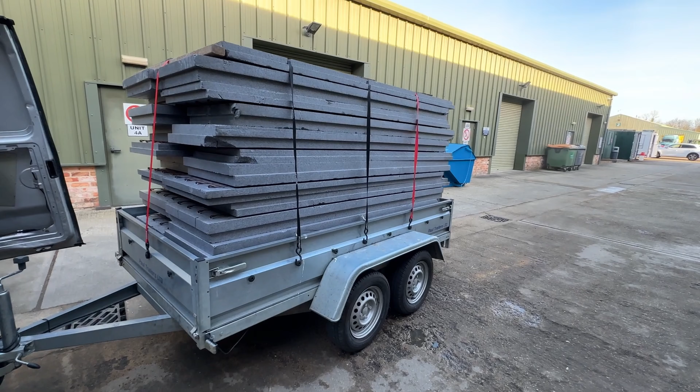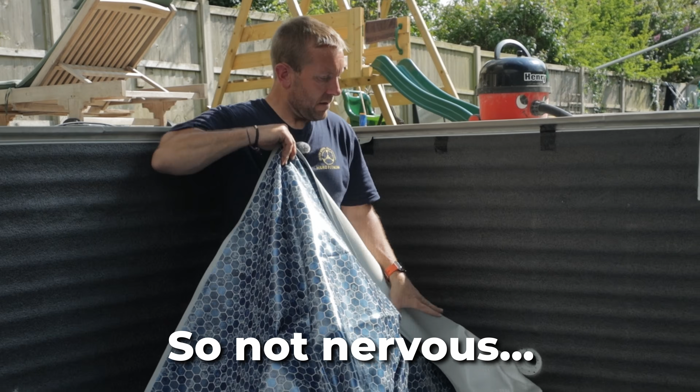What a journey it's been, from planning out the swimming pool to buying the walls to digging it to getting the base installed to getting the walls built up to designing and installing my own folding pool cover. We are finally here, possibly the most nerve-wracking video I've ever made on this channel, putting a swimming pool bag liner in and getting the whole system purged and in use. So don't go anywhere, this is a great video and for reasons you'll find out at the end, a very emotional one for me.

So we're back in the pool. This is something I've never done myself. I'm a humble plumber, but I've watched some videos on YouTube, and as you guys all know, that's the best place to learn. Max, I'm very nervous about this. Are you nervous? I'm not nervous. Max isn't nervous. Never, are you?

The liner has been in my office overnight, heating up to 30 degrees because it needs to be warm. We've held off doing this until the weather is warm because the liner manufacturers recommend we do it above 15 degrees. Today, we're talking about 20, 21 degrees. And this is just going to be a mad day. First thing I'm going to do very quickly is just hoover out all these tracks.

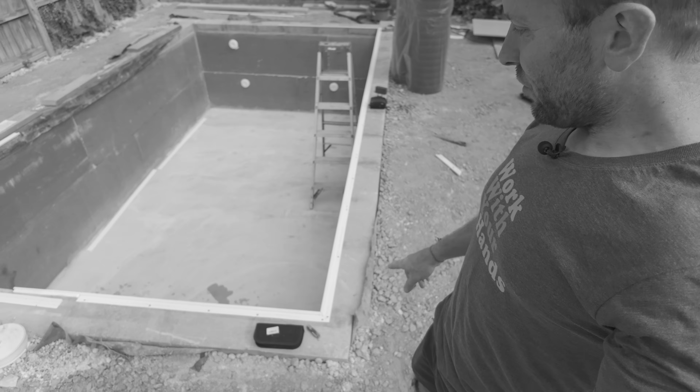Jimmy, hold your horses. We need to go back a few weeks first to before we put the first stones around on the patio. We've got all the brickwork in, that's all done. And I'm also getting in all the track around the outside, and I'll be showing you how I do that in depth in a few minutes time. But I just wanted to tell you that I've latexed the floor.

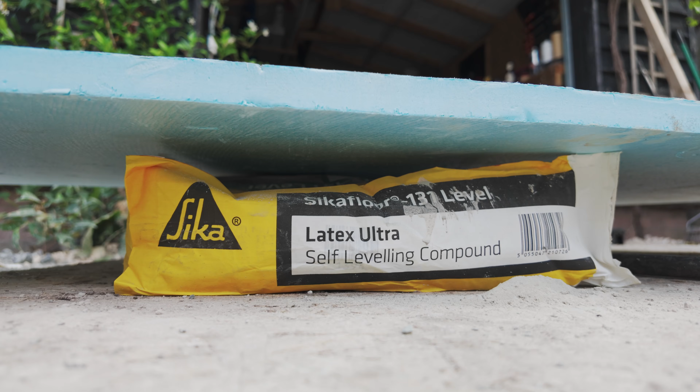Now I've used special latex for this. So for that, I've used Sikafloor 131 level. This is specifically for use outdoors and also for heavy traffic. So you can use it to finish off garage floors and things like that. I kind of thought it'd be perfect just to smooth out all the imperfections that we had in the floor before we put our underlay down. But look, as you can see behind us, we've got all our wooden beams in now. All our hardcore is now in, ready for the patio.

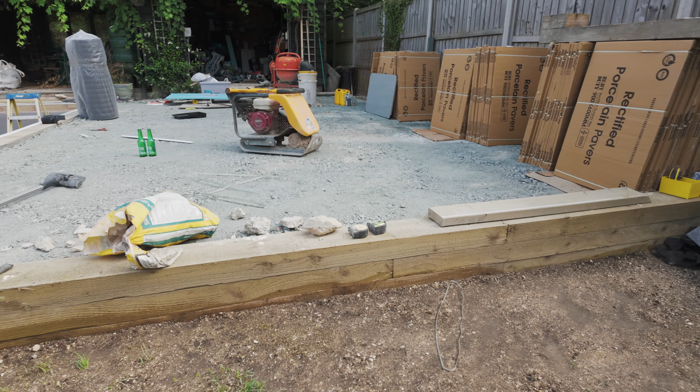So let me show you how I get all my liner lock installed. So what I'm using is top mount liner lock. So if we have a look closely on the edge, you'll see there's a nice little sort of groove that it can sit in just there. That's what our liner is going to sit in.

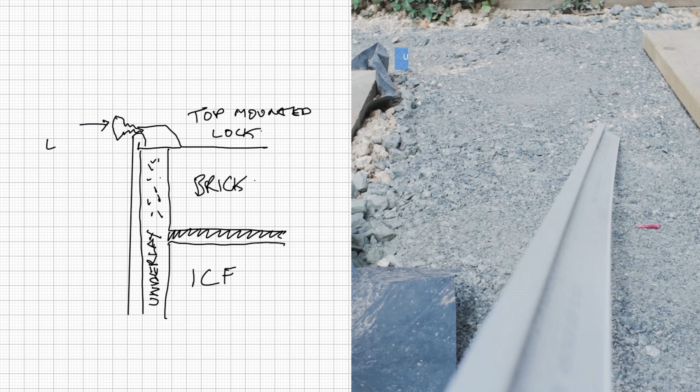And this is the reason I had to put this lot in, was because I wanted to have good anchorage points all the way round, because I suppose you could say the weight of the liner is going to go on that, but that's not really the case. Once the pool's filled up, the weight of the water is pressing outwards. It's not just dragging downwards. So I'm going to get the rest of this in, and I'll show you very quickly how I do it in depth.

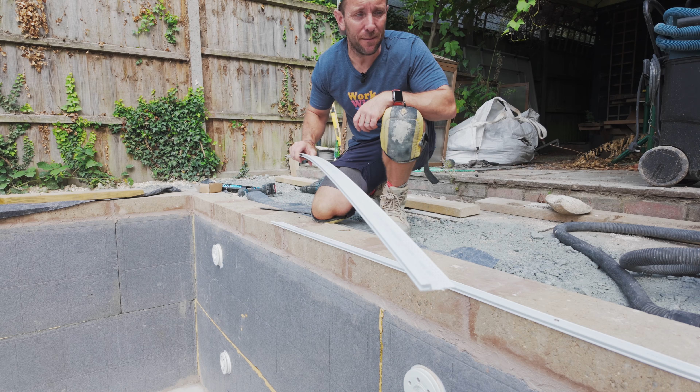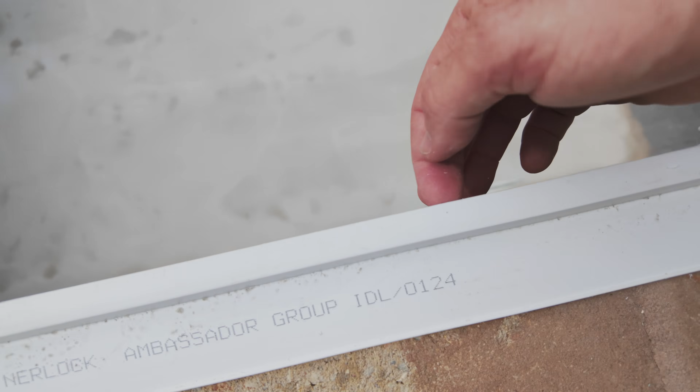First things first, with your lock, just cut the ends properly because it comes cut by someone who doesn't care about cutting stuff straight. So cut that end first before we then measure over and get our mitre. Now I can just butt that nicely up onto there, and we're leaving a few mil of a gap. I've just been using this to gauge that. I've got a little pencil mark on here because that will then take the depth of our underlay that we've got going along the inside wall just there, all right?

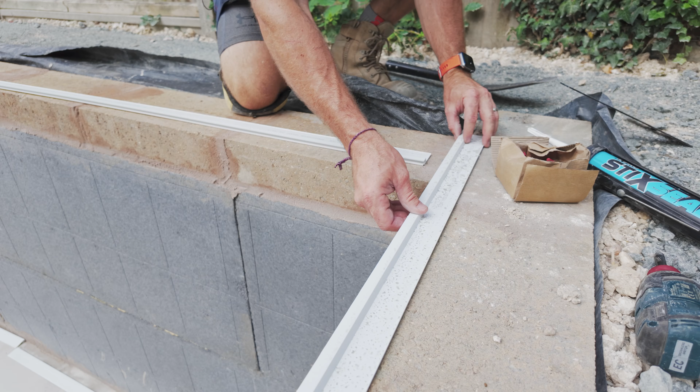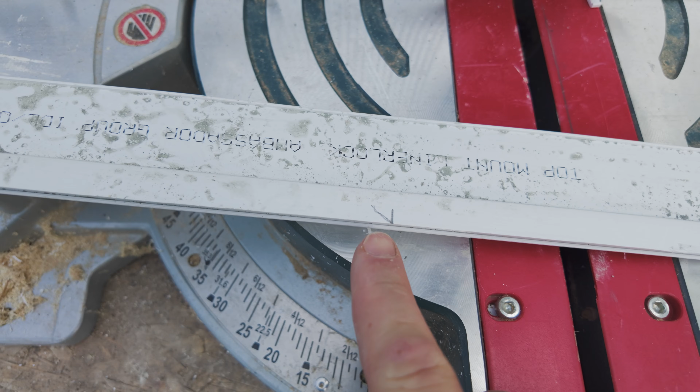And we've also got to do the same when it comes to measuring our mitre at this end. So we butt that up there, then we can nice and accurately mark exactly where we want that to be. So mark that there. And then I always put a little line, just indicating which way I want the mitre to go. So here's what I mean, here's our mark. So I'm gonna be using my beastly Bosch saw just to chop this. There you go, perfectly on that line.

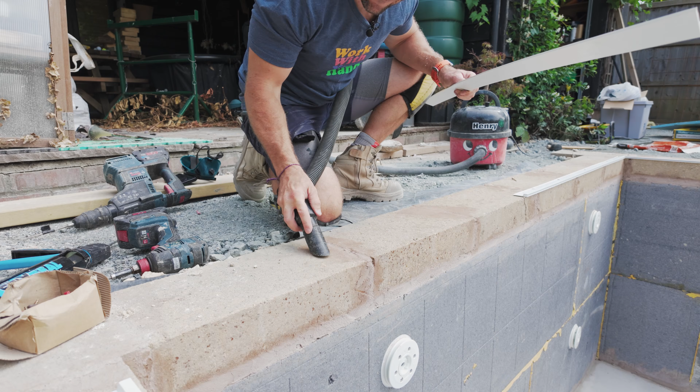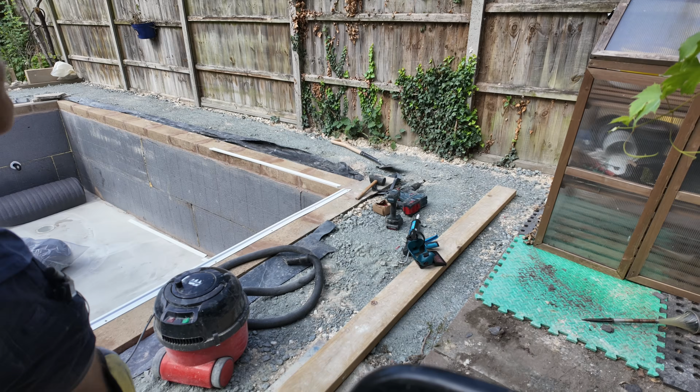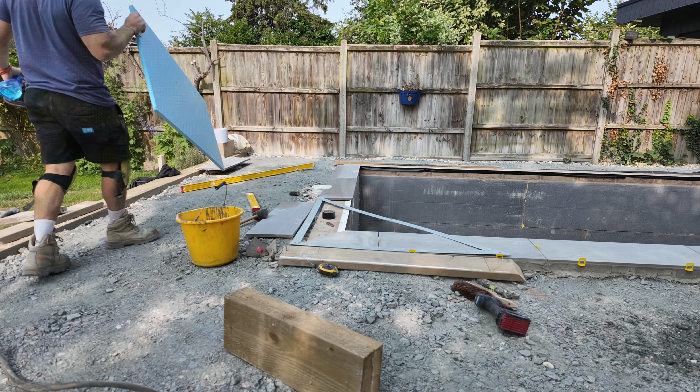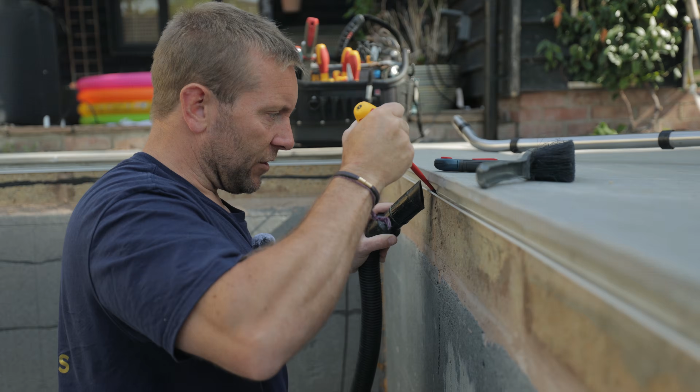So I thought it'd be a good idea for you guys to see that and know what I had to do to get that little track in. So let's fast forward to the present day. So hopefully this will just hold it.

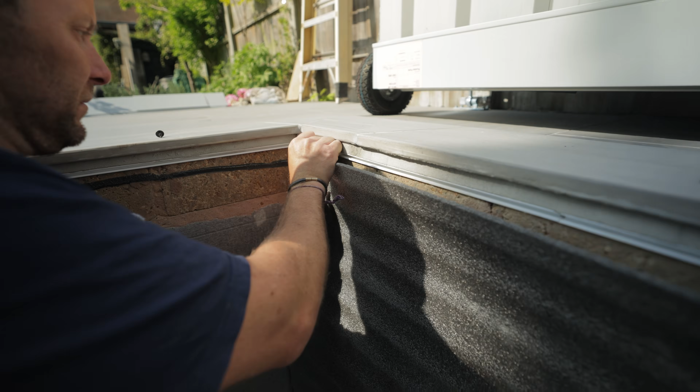So I had to stick on some underlay, which does one of two things really. It gets rid of all the impurities that you might feel underfoot or underneath the vinyl wall. It protects the vinyl wall from anything underneath, just in case you might have left something under there, like a tiny little bit of stone or dust or something like that. I mean, really, you shouldn't have done. You should have hoovered it out a gazillion times like I did before we started filming on this day.

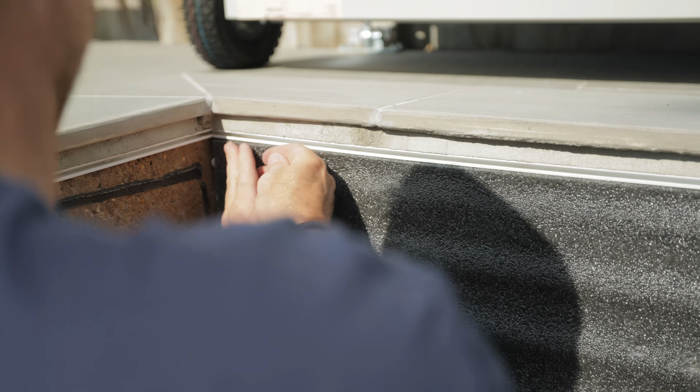But also what it does, it allows it to be nice and squidgy as well. So you've got that lovely kind of cushioned feeling underfoot when you're walking along.

I know you like filming, Max, but come on, give us a hand.

The problem was, when I went online to look at underlay for swimming pools, specifically for that, the price per metre is about 10 times more than what it is for what we're fitting here, which is underlay for AstroTurf. So that stuff's designed to be outside, it's designed to be in wet conditions all the time, and I thought, well, you know what, I'm going to use that.

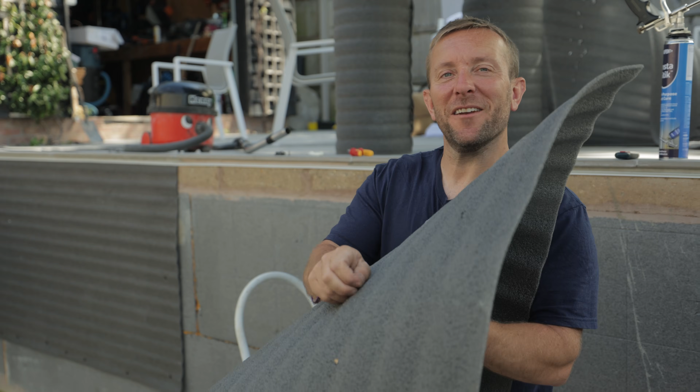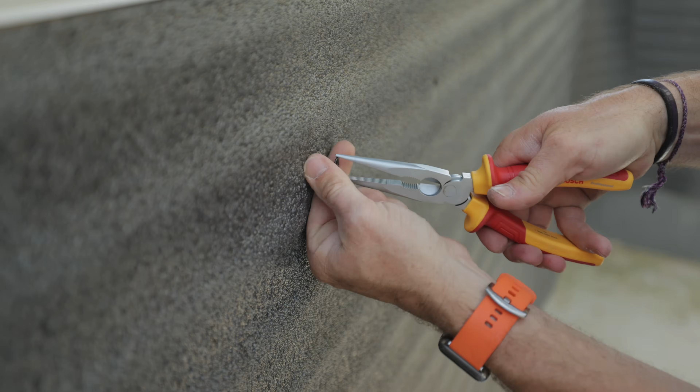The plan here was just to use an adhesive gripper foam, let it go off tacky for about 5 minutes, and then we stick the underlay on top of there. And it was getting hotter and hotter as well, so once that happened, it started to kind of warp a little bit in the sun, which is a bit annoying. So what we did, we used some pins to pop on there while it went off, and then removed those pins once it had gone off.

At this time as well, I thought it was a good idea to grab the massive parasol thing that I'd bought and bring that round as well, so that would give us a little bit of extra shade. I was very, very happy with progress.

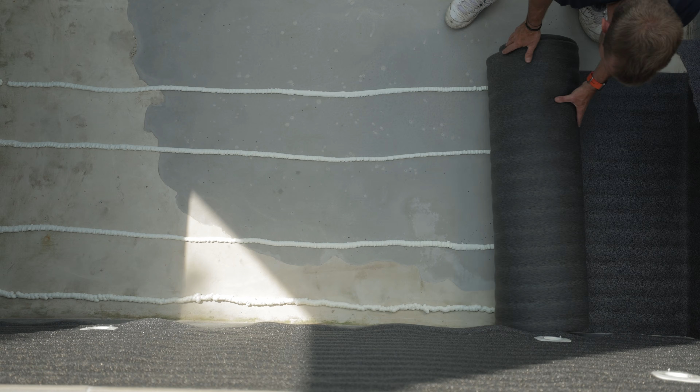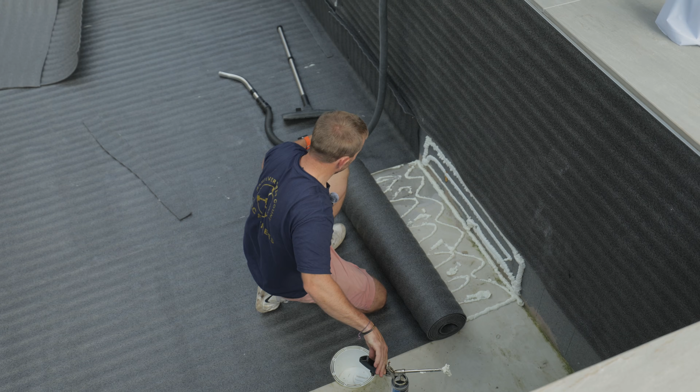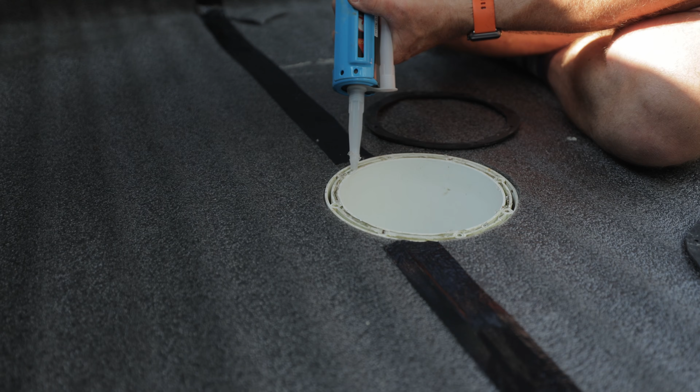Once we got the walls and floor all installed, it was then time to actually prepare the sumps. So for belt and braces, I put down some silicone and then the actual sump under seal. So this is the rubber gasket that I'm putting on here, just making sure that that's stuck down, ready for the next and most terrifying stage, getting the liner out.

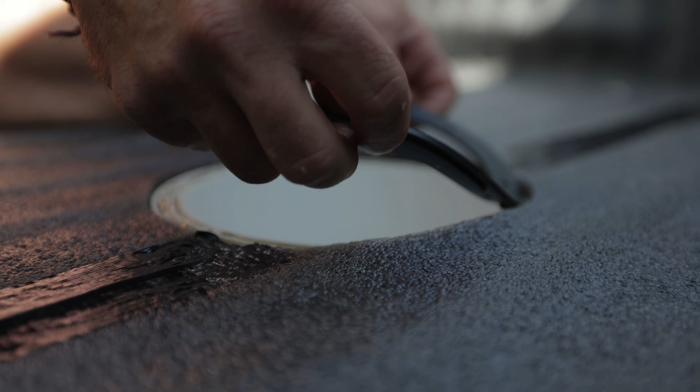I've never done anything like this in my life. I don't know what I'm doing. I really, really hope that my measurements, because I measured this, are correct. Let's find out. Ready? Yeah, cheers, mate.

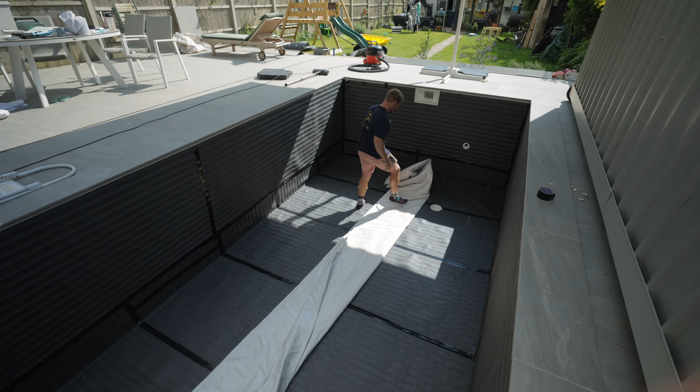So, what have they written on here? Skimmer end. Right, so when this was made, I measured this, so if it doesn't fit, it's my fault, unless they haven't made it to my measurements. I'm sure they have. This is their duty. They've marked this as the skimmer end. This is obviously the skimmer here.

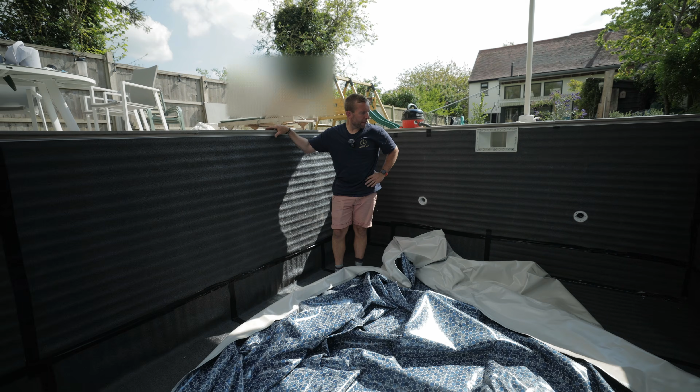So what we're going to do now, basically we've got to get it in so we know that our joins and everything are right. There's going to be a lot of moving about, getting stuff in the right position. At this point, the batteries in my microphone ran out, which was probably a good thing.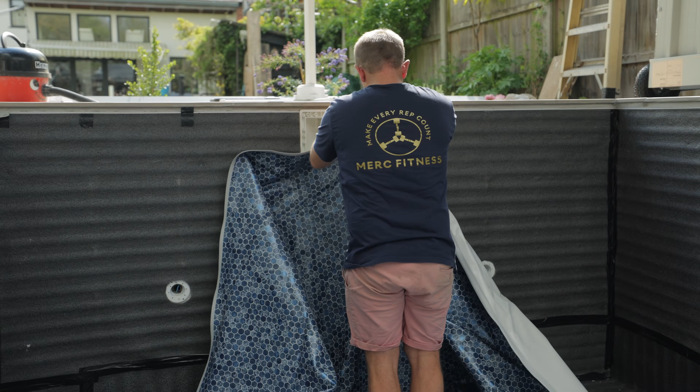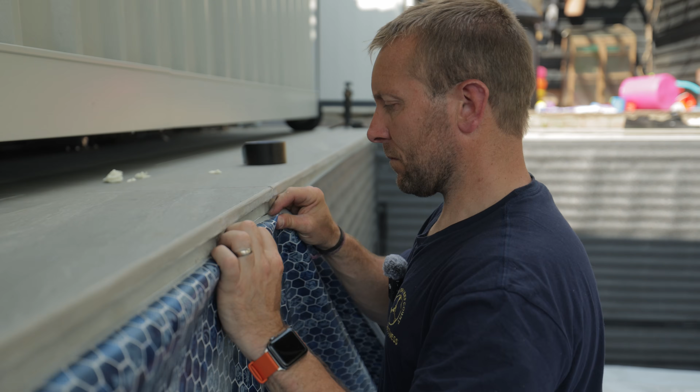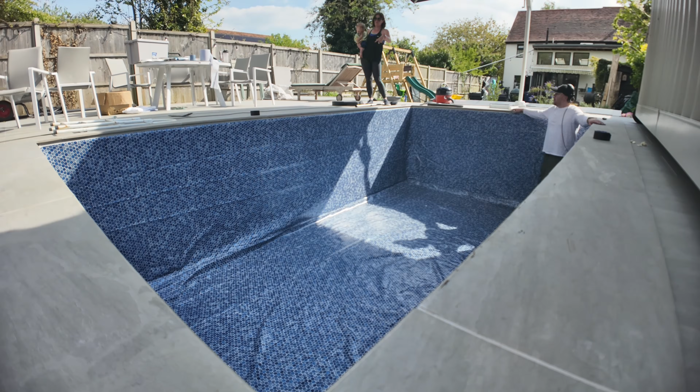So the first thing we had to do is actually get the bead liner at the right end. As you saw there, it was marked skimmer end. Then you've kind of got to orientate it because there are 4 sides to it, and you can see those sides in the seam cuts that they've done when they actually make it. Another thing is the material can actually stretch to 200% of its current size, which means they actually make it slightly smaller, so when you fill it up with water, it stretches out into the spaces.

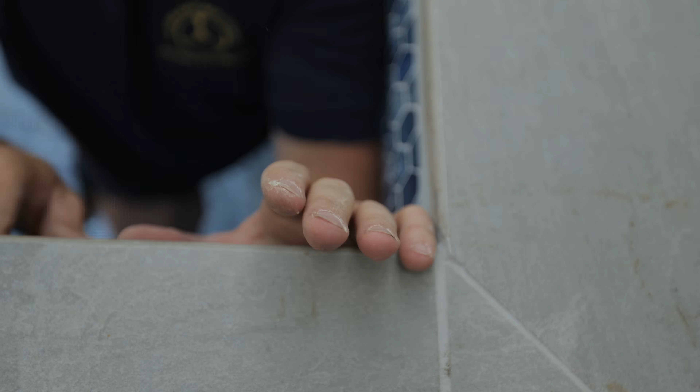Honestly, I don't actually know what I was worried about. Once we started doing this and getting it all in, there were a few expletives to Max, who kept giggling behind the camera, and I was like, Max, can you just give me a hand, please, mate? I'm getting really quite annoyed with you. It all went fine. Yeah, it was a lovely day.

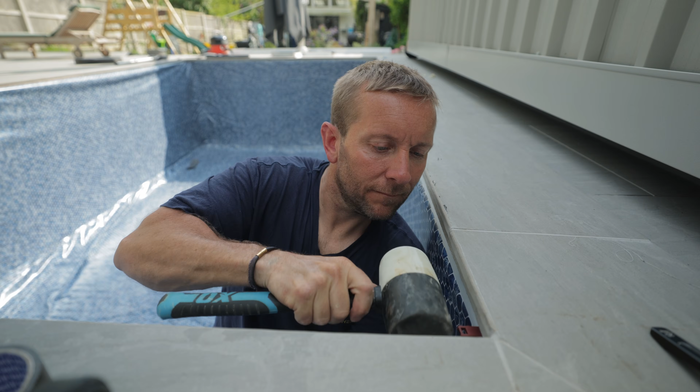Really enjoyed it. So now we got it in position, we needed to figure out how we were going to get rid of the wrinkles. This is when a vacuum cleaner comes in very handy.

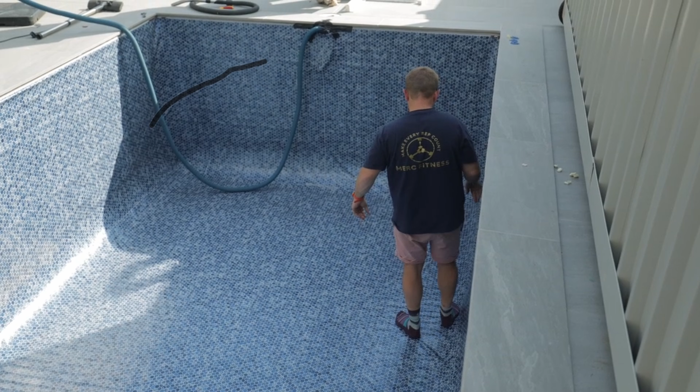And there it is, my massive Bosch Hoover. Gaffer taped around the top where the skimmer is. Does look a little bit like that scene out of Spinal Tap.

Do you have any artificial plates or limbs?

But the Hoover I was using for this is perfect because it doesn't actually overheat. It could just run literally all day like that, sucking out all the air behind, and then I could go around with my feet and wheedle out all those little wrinkles.

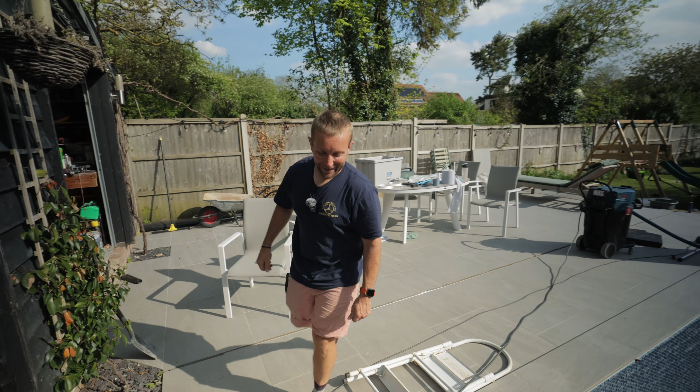Max, well done. That was a good shout. Why do we not just do what the professionals say? Well, that's ready for water, mate. Filling the pool up. I can't believe it. The little bit there. Once it's filling, I'll say in it. Wow, man. Isn't it mad? Don't you feel like, whoa, it's been such a long time to get to this point?

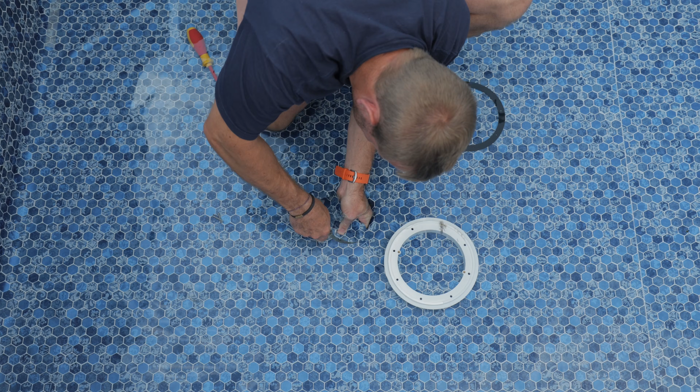So having watched YouTube and seen other people do vinyl liners online, I knew I had to wait till there was about an inch or two of water in the bottom before I started cutting my sumps in. Don't worry about those wrinkles behind me, they all came out once the pool had started filling up more and the water was pushing out into those corners to get rid of them.

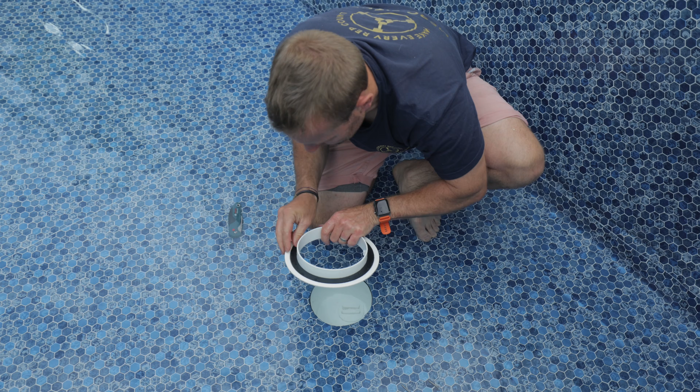The hardest part of this was finding the sumps themselves and also then finding the screw holes and also just cutting them with a very sharp Stanley knife and not dropping it and just not making any mistakes. I took plenty of time over this, even though the water going in was 14 degrees and my feet were getting really quite cold. Got those rubber gaskets over the top.

I knew that my bottom gaskets were going to be in the right place because I'd glued them down already, and it was just all that forethought that goes into doing jobs like this always comes together at the point when you need it to. You just have to do the forethought first.

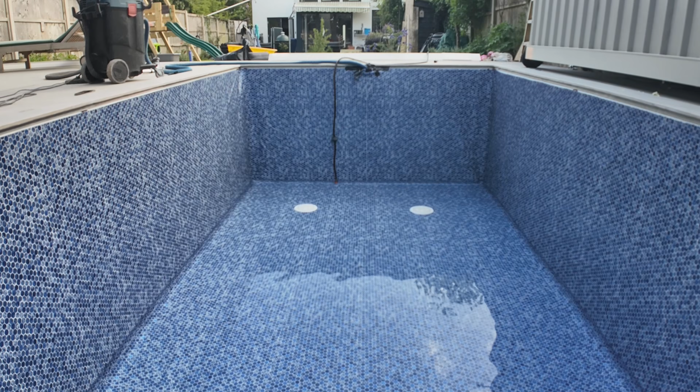Now again, because I've been online and actually watched videos of people do this already, I knew that I didn't want to cut in my bottom outlets, the lights and the top outlets until the water level had actually reached those outlets. So we spent the rest of this day filling the pool up, every so often popping the Hoover on so it sucked out, and also lighting the barbecue.

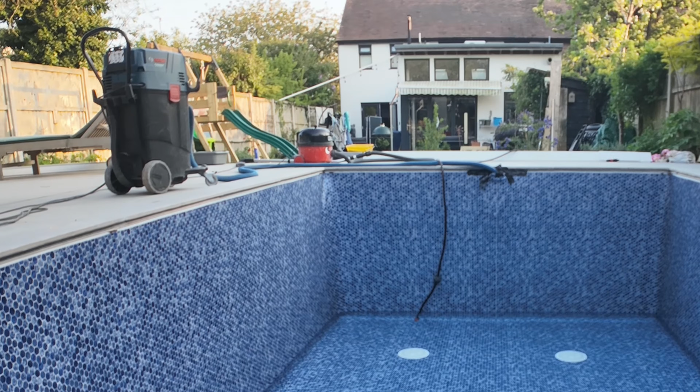Right then gang, it's another day. I didn't leave it filling up overnight because we've got some stuff that I needed to do on the outlets. So let's just turn this on. I've marked out all my outlets with just a little bit of gaffer tape. So the bottom outlets are going to need to be done now. And then I've got to do the lights after we've filled up for about another 2 or 3 hours.

Any minute now, we're going to be cutting in our bottom outlets that I've just marked there, the couple of bits of gaffer tape. So it's going well, guys. Look how beautiful the pool's looking. Isn't it just sweet? So to get the outlets in, first you've got to find them. I obviously gaffer taped mine.

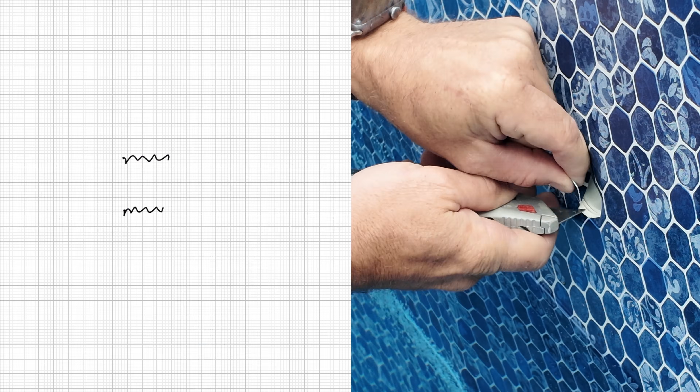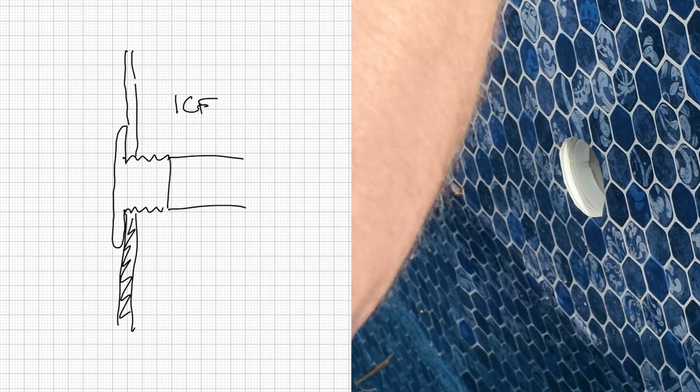I pulled the gaffer tape off and then very, very carefully with your finger, feel the edge of the outlet hole and then go around it like I did with a really, really sharp Stanley knife. There is no margin for error here. One slip and that Stanley knife will go straight through the vinyl, perhaps in the wrong place, and you've ruined your vinyl or you've got to make some sort of puncture repair.

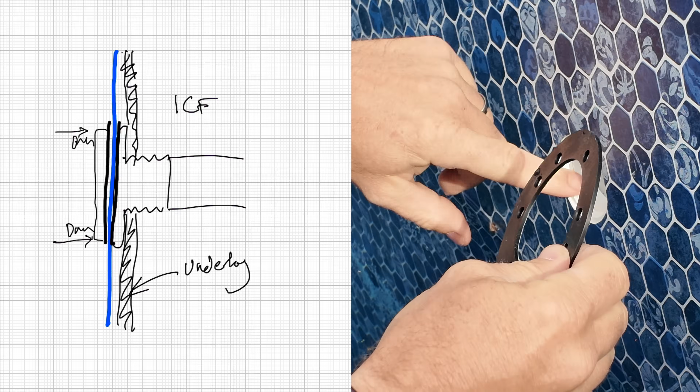Now, I made a mistake here with this because this has got a sticky back on it. I should have just stuck that on before I put the liner up, but I haven't, and this is where we are now, so that's life. So I had to then just feed it through the hole that I'd cut. Then I could find the screw hole. Then I could put the plate and the gasket over the top, screw those both up, put the decorative plate on, and I was finished.

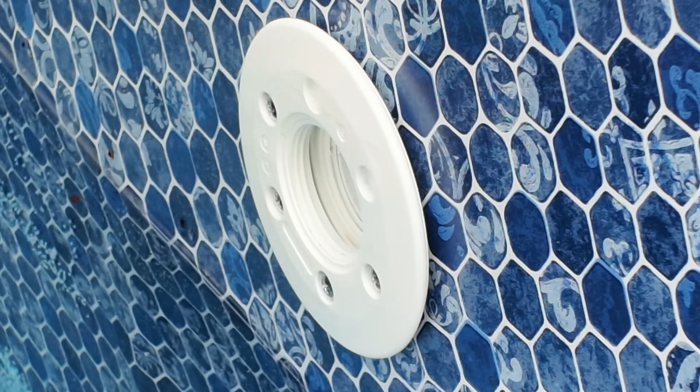I did this 4 times, and if I ever did this again, which I'm probably not going to do for about another 5-10 years, I would definitely stick my gaskets on first time. I had to do exactly the same thing for the lighting, although the lights were a nightmare because I don't know who designs these lights.

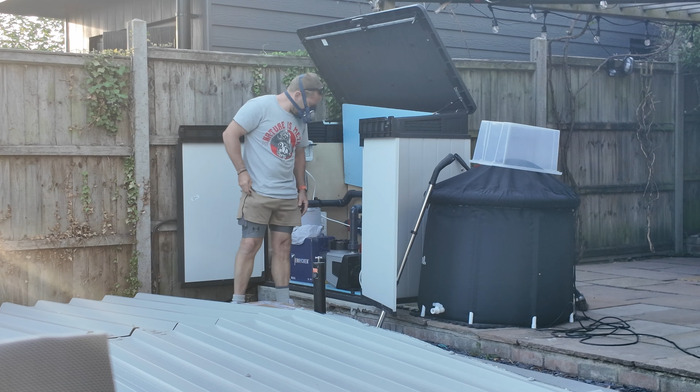They screw up so far into the conduit that I fitted, so I did have a few problems doing this, but I got it in the end, and I also just belt and braced it all with a bit of PTFE on the thread as well, even though it was actually sealing on some flats with some rubber gaskets on the back there.

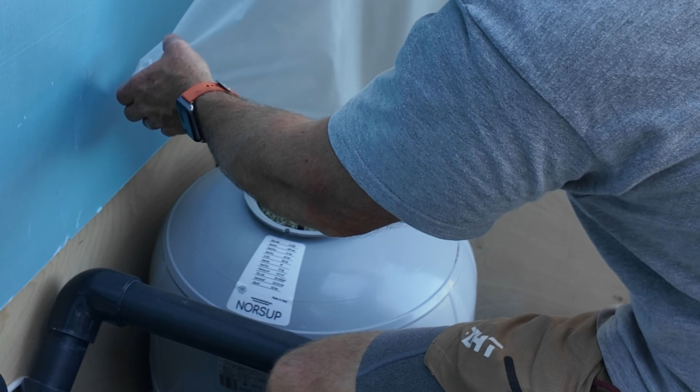Now I had a long wait for the water to fill up towards the skimmer level so I could do that. So in the meantime I added all my filter media, which is basically specialized glass. It used to be sand, but they use glass now. I had 3 25 kilo bags of that to put into the filter. Also, while I was waiting for this to be done as well, I shut off the valve to the filter and filled it up with a hose from the top, and also did the same with the pump. So we were ready and primed to turn the whole system on after I'd done the skimmer.

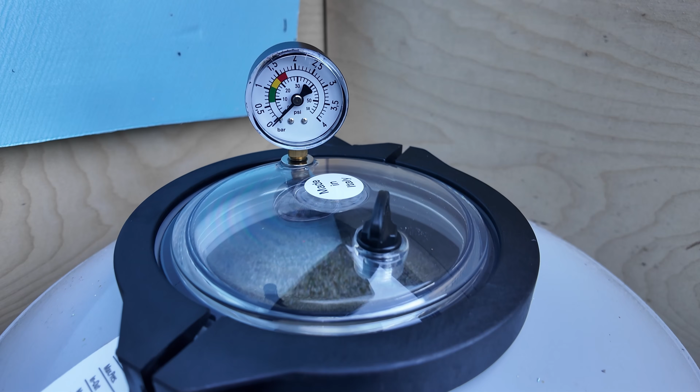So it's a bit warmer in here now because it was getting up to a certain height on a man where you don't want cold water, all right? They were sort of clutching themselves away. They were like, oh dear.

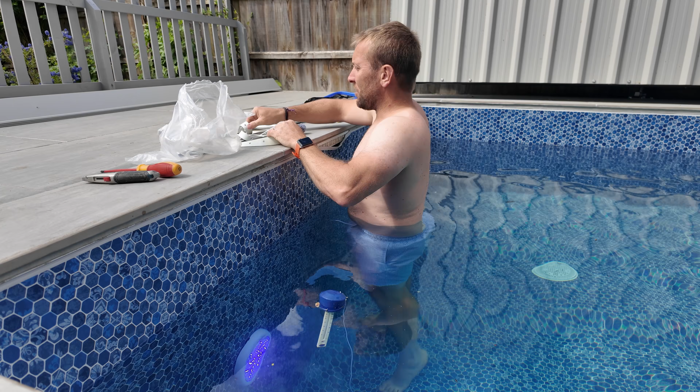So yeah, I'm just going to get these 2 top ones cut in. Then we'll have a look. I'll show you exactly how I'll do this skimmer because I don't know. I don't know either. On this really quite chilly Sunday in 19.5 degree water. So we've got 2 seals to go in, a seal at the back, seal at the front. It's pretty straightforward really. I'm just going to read the instructions to make sure. And yeah, oh dearie me, it's cold.

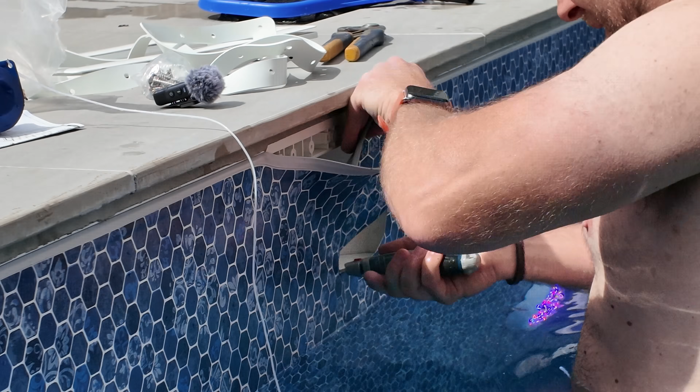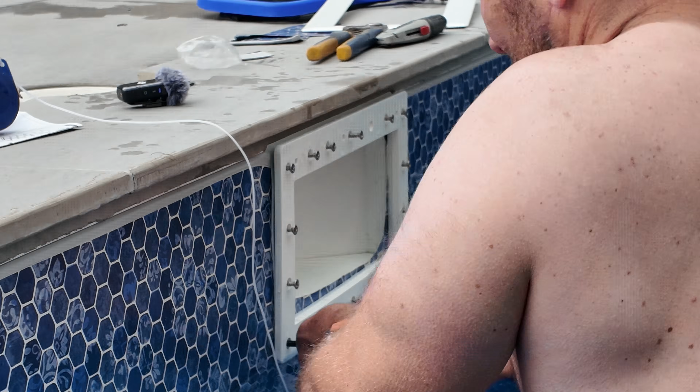The skimmer is just like everything else. Find out exactly where the skimmer lip is, cut away with a very sharp Stanley knife where you don't want your vinyl to be, pop the underside gasket on, the top side gasket on, and then the fascia plate. And then obviously after that, drop the screw into the freezing cold water and then have to go down underneath to get it up again. And it is chilly. All right. Oh, I'm cold now.

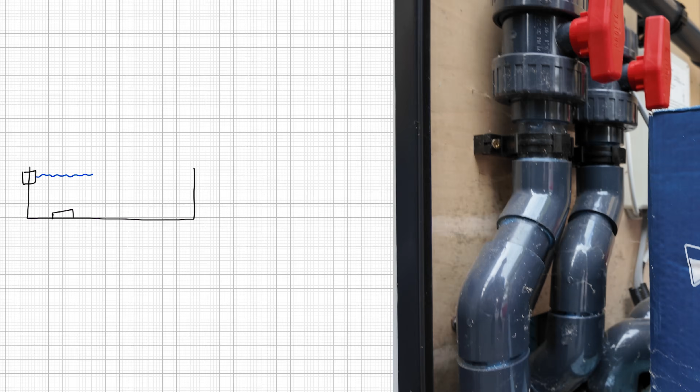It's now time to fully purge the pump and get the whole system working. This is a majorly stressful moment for me because all this pipe work I've laid in, I have pressure tested it, but you just never know, do you? So obviously our water level is there, and that is the same for the pipes that come off to the inlets just here, but also up from our skimmer and our sump.

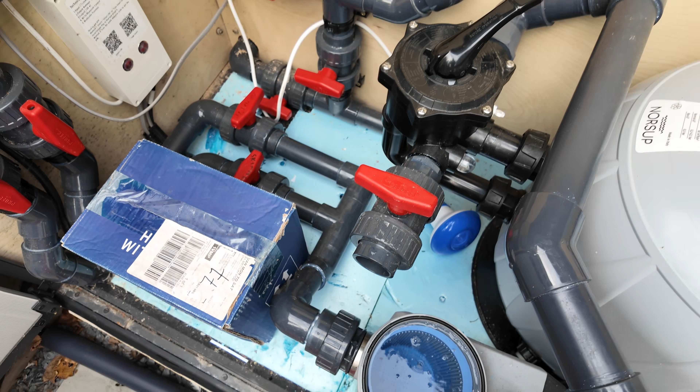So what we need to do is turn the skimmer off, turn the sump off. Let me try and create a little prime, so that now the water's not falling all the way back to the pool again. It's staying up here. And if you want, I can demonstrate it for you now. If I open that valve up, this water level is going to drop down. So say let's do the skimmer. Look at that. Because it's just going back to the skimmer. It's going back to its happy level.

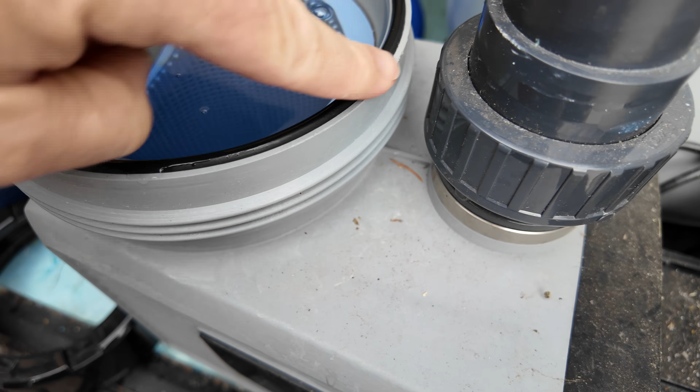So I'm going to fill this up as far as I can. I'm going to want a few buckets to do this. Make sure that our O-ring is nice and clean. Pop this on top. Do this up. Set this valve here to filter. And what I'm going to do is use this app to go to the pump and then set this just to circulate, turn on, because at the moment this pump will only come on when the air source heat pump is heating, which obviously I haven't had running yet. So confirm. Right, so it's about to come on then. I just turned it off.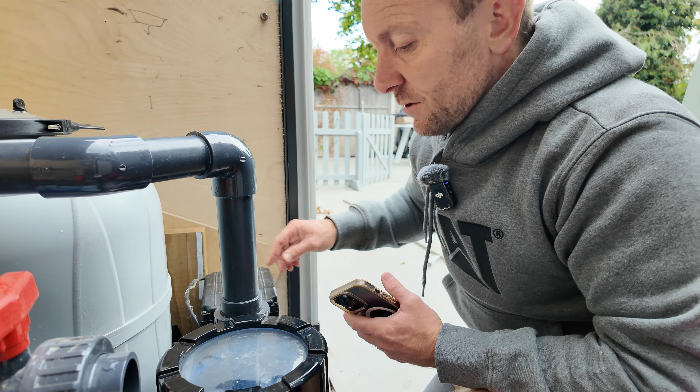So what I've got to do, and this is so good that as a plumber I'm like, oh, I completely understand this process. It's so sort of easy for me to do. We turn the pump on, and then before the pump's built up a load of pressure, what we want to do is suck up solely from the sumps. So that's what this one here. We know all the pipe work going back to the sumps is pretty much empty now. So this is going to take probably 5 or 6 cycles of us doing this.

So turn the pump on. It's going to run up. Open that. Oh my God, it's happened first time. Whoa. Oh my God, that's so good. Slowly open the skimmer up. Let's see if we can get it back from the skimmer.

Now the skimmer's struggling. I'm happy with the sump though, so I'm going to bring that more shut. So if you look there, you can see the water flying out, but we really want this water to be right to the top of this little window here. So I'm going to shut the skimmer off, add a bit more water, get that right full to the top.

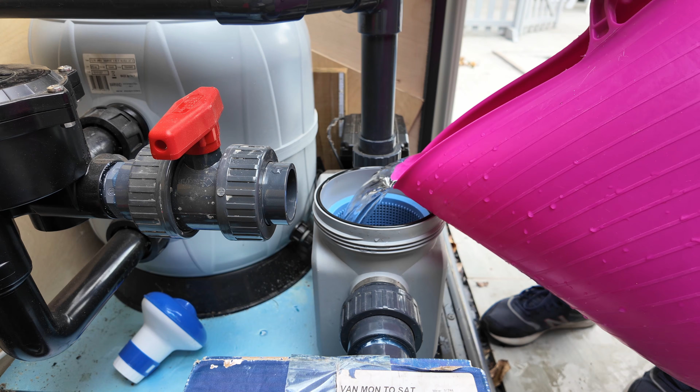God knows how long this must take if your plant room's like 2 or 3 meters above the pool water level. It must take ages. Wow, look at the water coming out of here. Oh, look at that. All the air coming out. It's purging all the air out of itself. Oh my days, this is so good. There we go, gang. Sucking nicely.

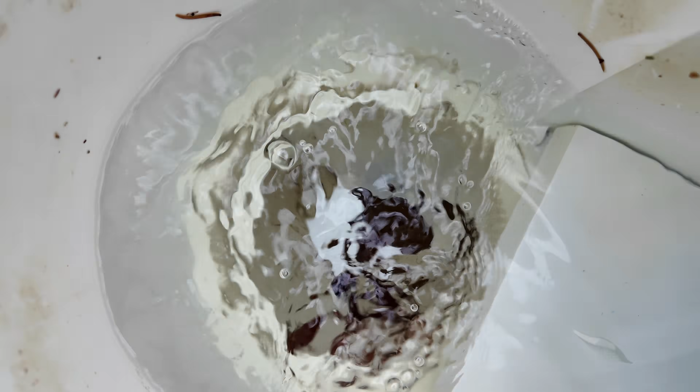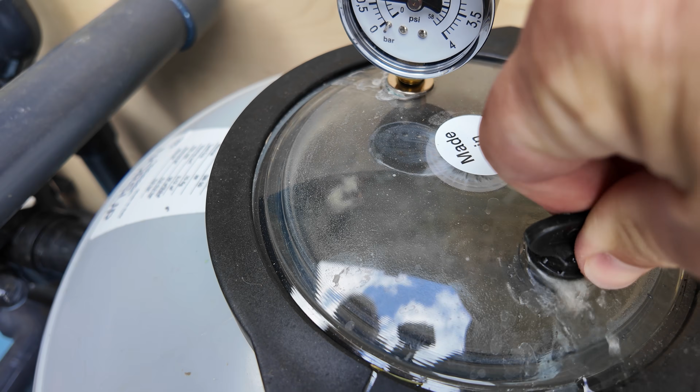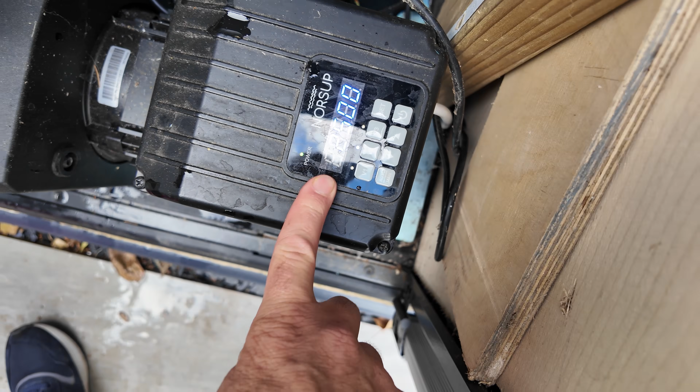Woohoo! So guys, there you go, all purged. And we're filtering. Got water filtering about in there. Probably more of that out now. Pressure's sort of in the green. Nice. Oh, it's all working. I've got the sumps on half, skimmer on full. This is on 2,500 RPM. Quality.

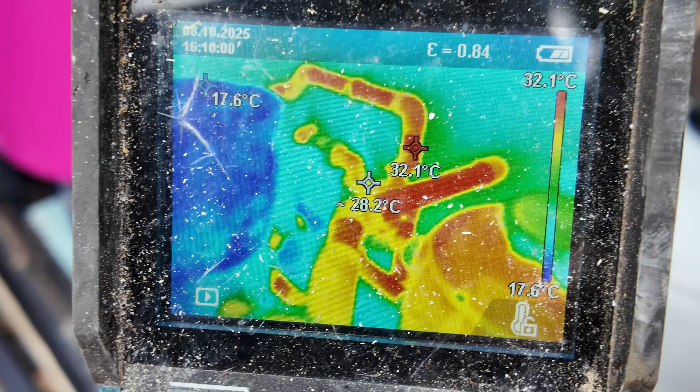Oh my days, everybody. Can you see that? 32.1 degrees C. Just check out what that looks like on the old thermal camera as well. That's sweet, isn't it? Time to dive in, everybody. And I'm filming this now in October. And what's keeping it warm? All that insulation underneath that cover.

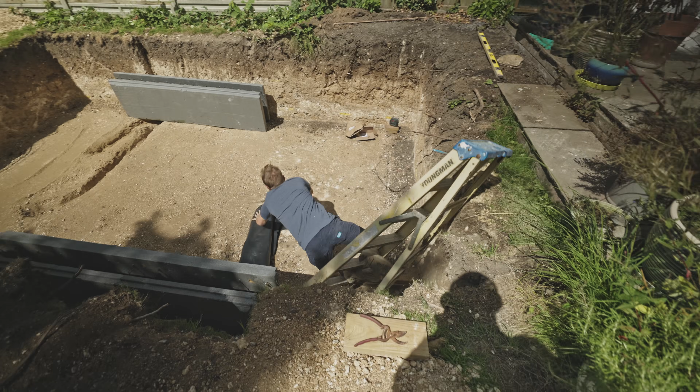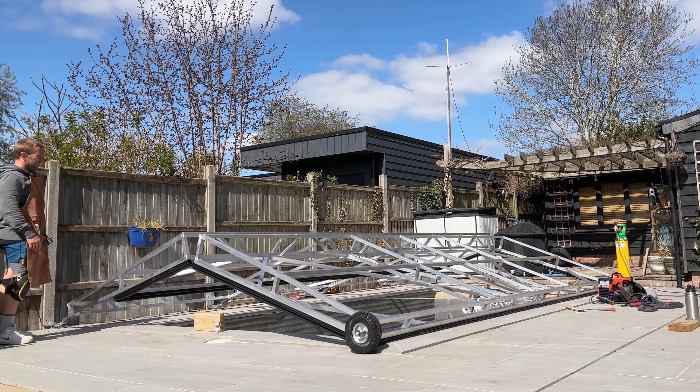What a journey it's been, from driving up to Sheffield to buy the walls, to digging in the baking heat, pouring the base just in time for it to pour down with rain, getting the walls and pipework installed, having loads of help with the patio, designing and inventing my own folding pool cover, to finally getting the liner in, getting everything filled up and getting it powered up too. An emotional moment getting in here for the first time.

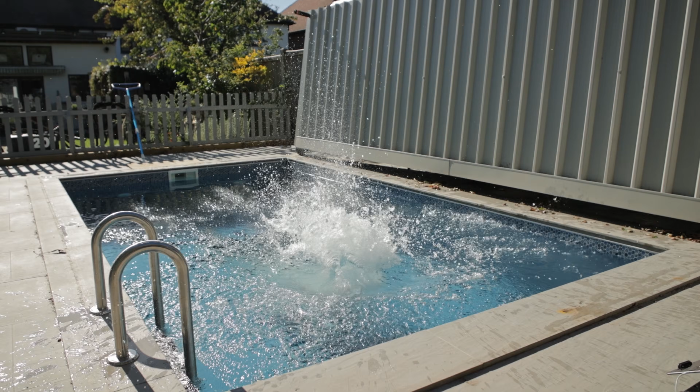And if I'm honest with you, I've been using this swimming pool all summer. My friends and family have enjoyed it. We've had an absolutely great summer in here, and I'm just so happy and so proud. I remember walking up the garden while my friends and family were enjoying the swimming pool one hot summer's day this July, and just having a smile on my face. It's absolutely brilliant.

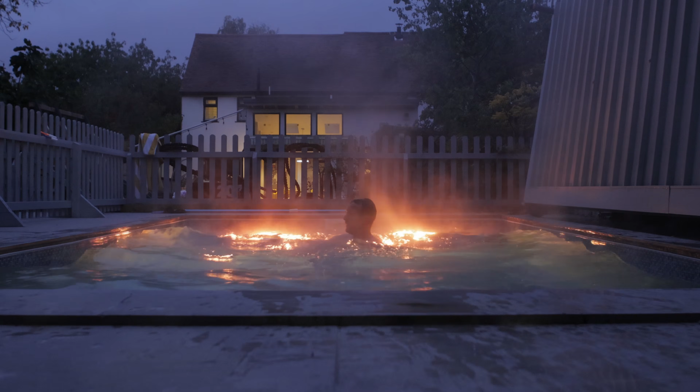So there you go, the pool is now finished. And I'm really, really happy with it. I'm really pleased. But unfortunately, finishing the pool off is also tinged with quite a lot of sadness for me and my family, because about a month ago, my brother-in-law, or my brother pretty much, suddenly passed away, and he helped us to dig this pool, and he helped me to lay the patio, and he helped me to do a lot of things on this, and he was really proud of us.

He did enjoy spending time in this swimming pool with me and Ted and his sister and everything, and we had some great parties in there, but it's just tinged with sadness knowing that he's never going to be able to enjoy any more splashes around with my son, his nephew, or to come around and enjoy times with us here. So I dedicate this whole series of videos to Tom, my brother. You died far too young. I love you very, very much, and I miss you a lot. Miss you very, very much.

We all do. But thank you very much for helping me dig this swimming pool and for supporting my channel from the very, very first video back in 2011 or whenever it was, and supporting everything that me and your sister and now your nephew have done. I will never forget you, and I dedicate all these videos to you. And I miss you. Sorry guys, that was really hard to edit and explains the delay that there's been in the videos about the swimming pool.